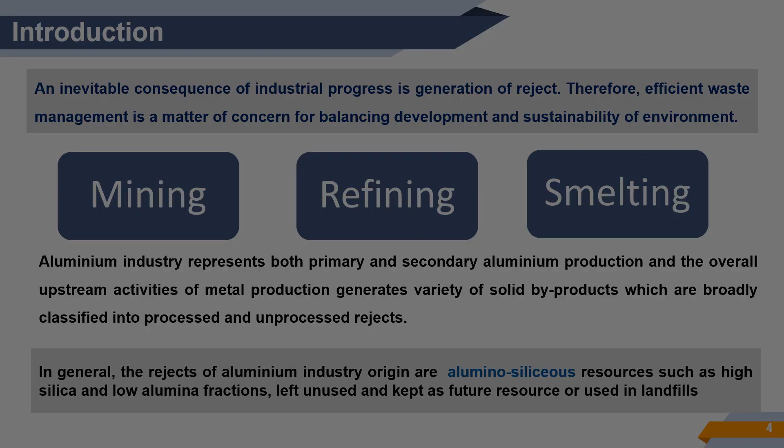Over the years, the outlook on process leftover or byproduct has changed, and the leftover materials are considered the best resource for secondary applications.

Solid rejects of aluminium industry are precisely inorganic materials, and most of them are mineral-rich secondary resources. These materials are a readily usable resource for industries such as building and construction, road construction, paint, pigment, and paper industries, ceramic and castables, and are also useful for extracting valuable mineral values such as rare earth and precious metals.

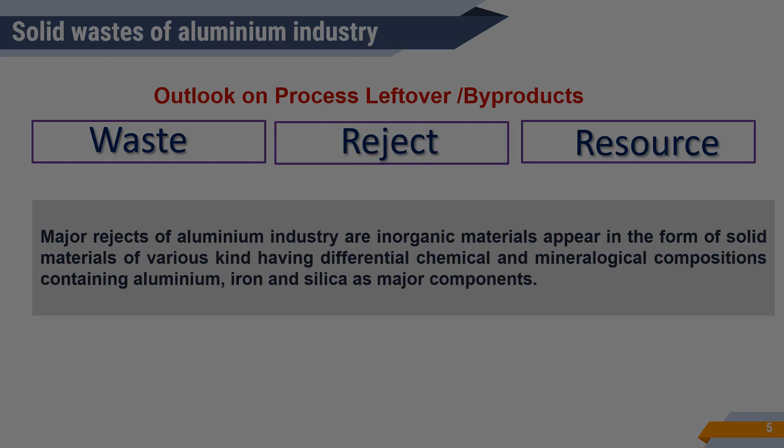Both primary and secondary production of aluminium are left with a variety of solid rejects which are useful material for productive applications. Many of the rejects from the aluminium industry appear in ready usable form. The advantage of rejects from aluminium industry is that they possess innate material synergy among themselves and with many reject materials of other sources such as steel, power, oil, biomass, etc.

That means, based on the chemical and mineralogical composition, these materials can be mixed together to make a composite of better quality for specific applications.

The details are discussed here as alternative resource for the production of different types of building materials based on a non-fired and chemical process route. This presentation precisely highlights the potential of the processed and unprocessed solid rejects of aluminium industry origin as resources for making geopolymer products along with technical hints of value addition for commercial exploitation.

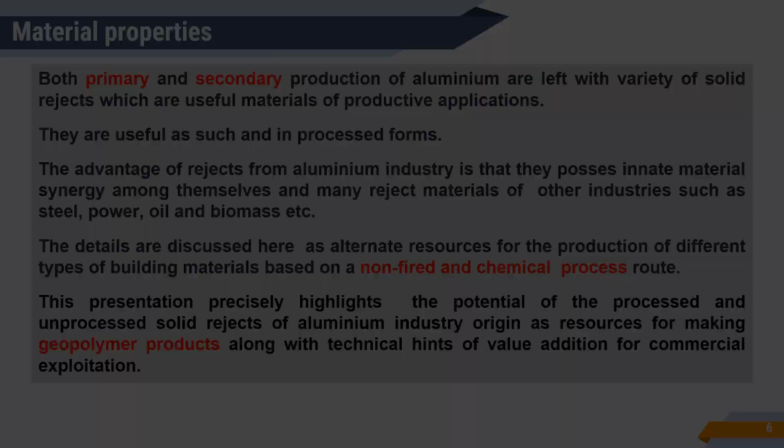The material input and quantum of byproduct generation is very typical for primary aluminium production. The raw material input for production of 1 kg of metal starts with approximately 4 kgs of bauxite, and the Bayer process yields approximately 2 kgs of alumina. Further, the energy intensive electrolysis process additionally consumes approximately half a kg of materials in the form of carbon and cryolite.

Since the quantum of waste generated represents the extent of pollution and material loss, there is a need for reliable and applied process options for rejects generated during the mining, processing, production, as well as recycling stages.

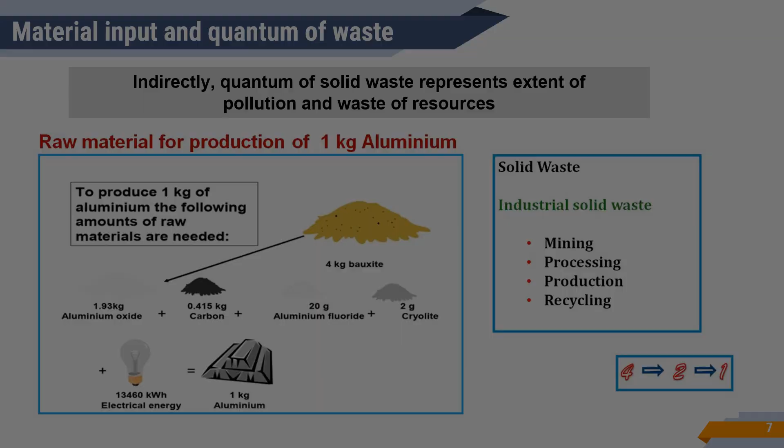Secondary aluminum production or aluminum recycling also generates different types of waste materials. The major solid rejects generated during aluminum recycling are filter dust, salt slag, and furnace lining. The chemical combination of these materials is good enough to make suitable combination materials with other industrial rejects or rejects from primary aluminum production.

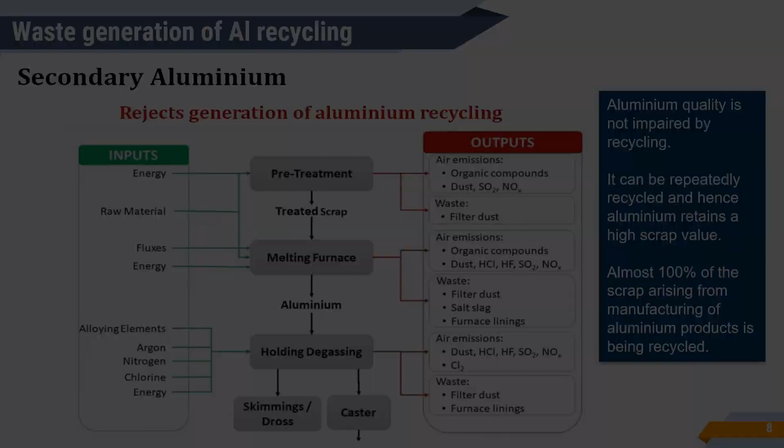Let us have a look at the processed and unprocessed rejects of primary aluminum production. Low-grade bauxite, overburden laterite, kaolinitic khondalite, partially lateritized khondalite, and lithomargic clay known as saprolite are some of the major unprocessed resources largely associated and available at the bauxite mining site.

Processed rejects of aluminum production mainly represent red mud, aluminum dross, and spent pot lining material known as SPL. These reject materials have distinct characteristic features, chemical composition, and mineralogical composition that differentiate them from the parent bauxite or the starting material used in the process.

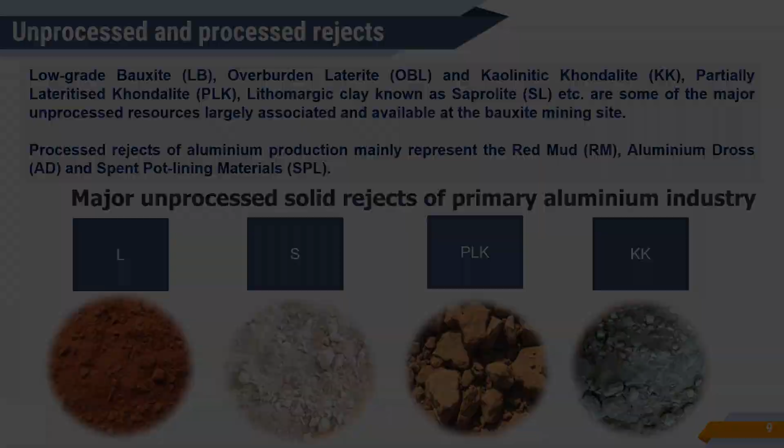Kaolinitic khondalite (KK) has similar properties to PLK and exists beneath the bauxite layer. KK possesses more silica, alumina and less iron in its chemical composition. In India, the bauxite mines of the Eastern Ghat region, located in Odisha and Andhra, have both PLK and KK horizons.

Saprolite is composed of clay minerals that result from in-situ weathering of bedrock by acidic groundwater. A complete laterite bauxite profile usually comprises four horizons and rests on the parent rock, which provides the source material for bauxitation. In most bauxite deposits of Western Ghat, Maharashtra, Chhattisgarh, Jharkhand, and Gujarat, this rests on a saprolite zone.

Lateritic soils are formed in the tropics through weathering processes that favor the formation of iron, aluminum, manganese and titanium oxides. This consists of minerals such as kaolinite, quartz, hematite, aluminogoethite, gibbsite, boehmite, diaspore, anatase, rutile, etc. The laterite contains high iron oxide, low alumina and low silica.

The laterite derived at the bauxite mine is generally known as overburden laterite, which is removed from the top layer during mining activities.

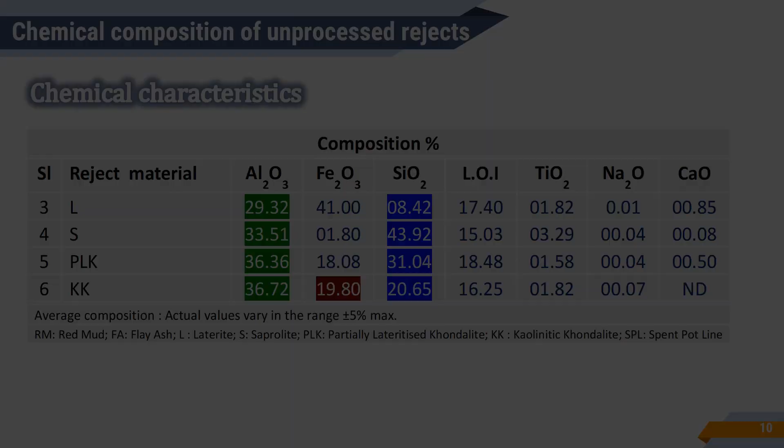Aluminium dross, bauxite residue known as red mud, spent pot lining (SPL), filter dust, salt slag and furnace lining are the major processed waste or reject materials generated during aluminium production. Red mud is the largest solid waste and the least utilized of all the solid rejects generated.

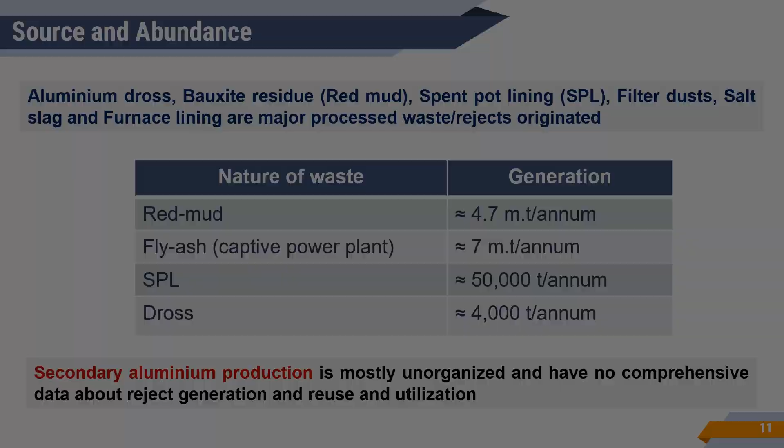Secondary aluminum production is mostly unorganized and has no comprehensive data about reject generation, reuse, and utilization. Red mud is the largest and least utilized solid reject of the aluminum industry. One ton of aluminum metal production generates approximately 3 tons of red mud.

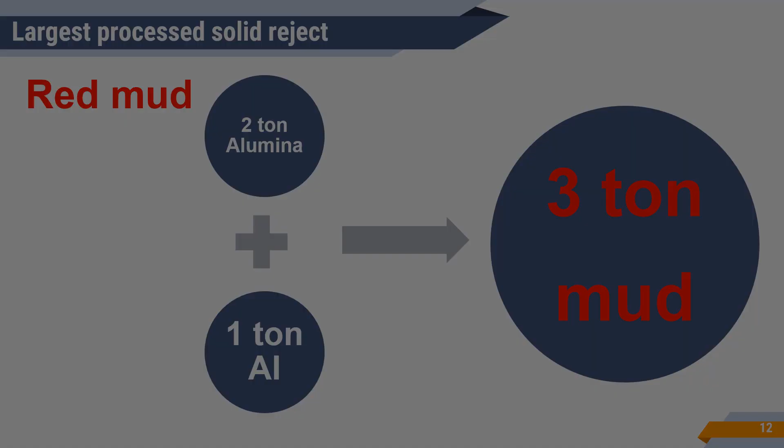The characteristic feature of red mud is a high percentage of Fe2O3. Almost 50% of the total mass constitutes Fe2O3, along with a good percentage of alumina and silica, as well as sodium and calcium.

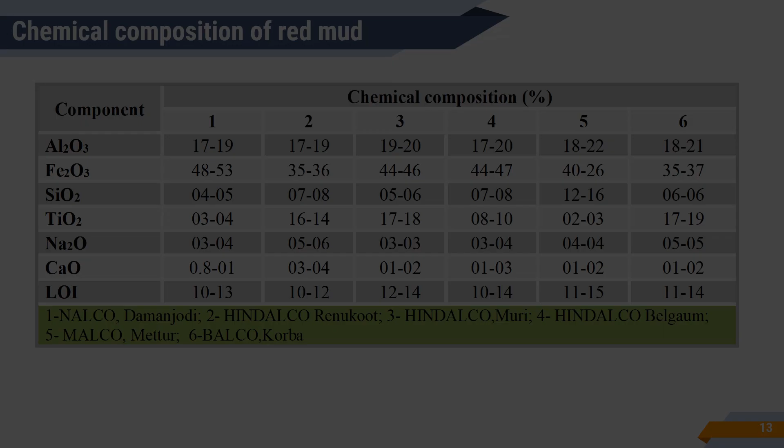Other processed rejects of the aluminum industry containing aluminosilicates are SPL, anode butts and aluminum dross.

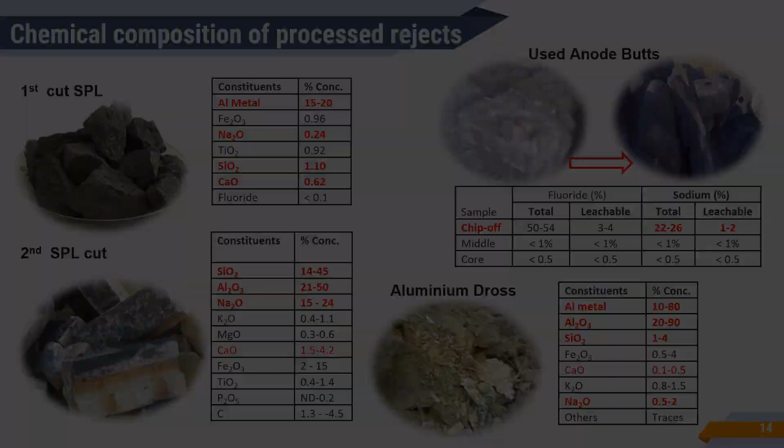Of late, industrial rejects are considered secondary resources for manifold applications involving recovery of mineral values, precursor for onward processing, as well as raw materials for product development. Resource augmentation based on workable utilization of rejects presents a successful model, highlighting the use of minimum processing steps, low emission, energy efficiency, speed, low cost, and marketing options, etc.

The vast increase in carbon dioxide and waste generation in recent decades has been a major obstacle to sustainable development and sustainability. In the construction industry, the production of ordinary Portland cement is a major greenhouse gas emitter, accounting for almost 8% of total carbon dioxide production in the world.

To address this, alkali activated materials and geopolymers have more recently been introduced as a green and sustainable alternative to ordinary Portland cement, with significantly lowered environmental footprints. Their use to replace Portland cement products generally leads to vast energy savings and reduced use of virgin materials, resulting in sustainable concrete production.

By doing so, it reuses the solid waste generated in industrial and manufacturing sectors, which aligns with the circular economy. In turn, it reduces the need for ordinary Portland cement and its consumption, and subsequent emission of carbon dioxide to the environment. As displayed in the previous slides, the chemical composition of almost all solid rejects of the aluminum industry suits well for making geopolymer-based cementitious material for building and construction needs.

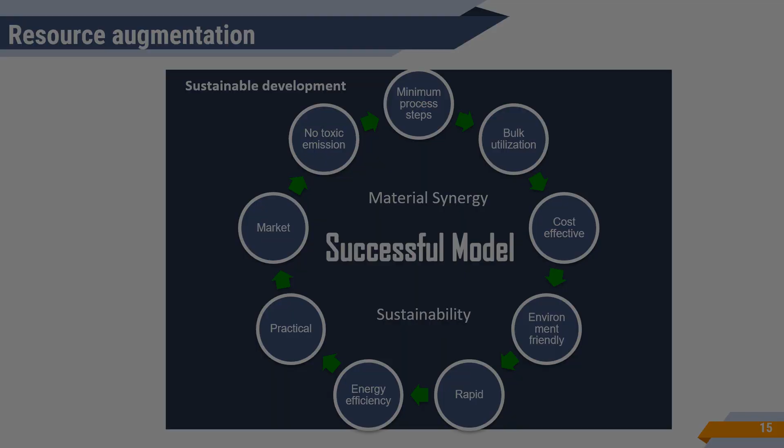Aluminum industry rejects possess high mineral values and excellent properties suitable for making sustainable building materials useful for infrastructural and construction applications. Sustainable construction refers to the adoption of building design, construction methods, and materials that are environmentally amenable. Through sustainable construction, we optimize the use of natural resources by recycling and reuse of material, so as to reduce our dependence on natural raw material.

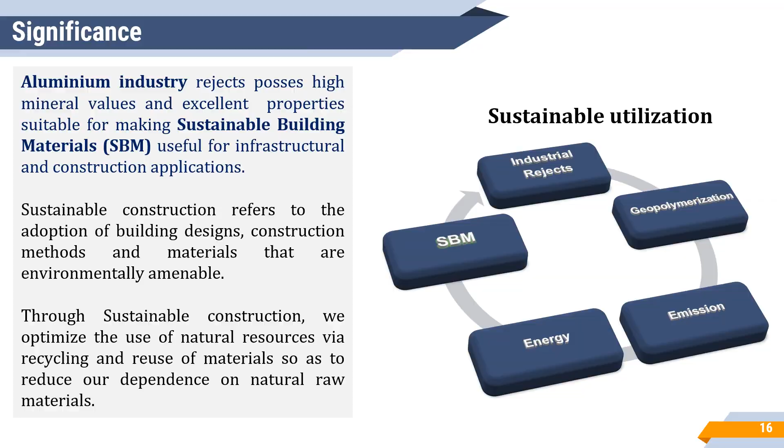The rejects and discards of processed and unprocessed materials of the aluminum industry are aluminosiliceous in nature. They contain a good amount of alumina and silica in amorphous, hydrated, and combined form. The chemical nature of this material is well suited for making geopolymer-based building materials as received, or in combination with rejects from other industry origins such as steel industry, biomass, power industry, or mining rejects of non-ferrous metals such as manganese, zinc, lead, etc.

Geopolymers are amorphous aluminosilicates which can be produced by the reaction between silica and aluminosilicates in an alkaline medium at ambient or elevated temperature ranging from 25 to 100 degrees centigrade. The technology was first introduced by Joseph Davidovits in 1978, and his work shows that its adoption could reduce the carbon dioxide emission caused by cement industries.

Geopolymer production process is simple, energy efficient, and eco-friendly. It exhibits excellent durability and good mechanical properties, and can replace conventional materials from low-tech to high-tech applications. In general, every material is suitable for geopolymer production which contains free silica and free alumina bearing mineral phases.

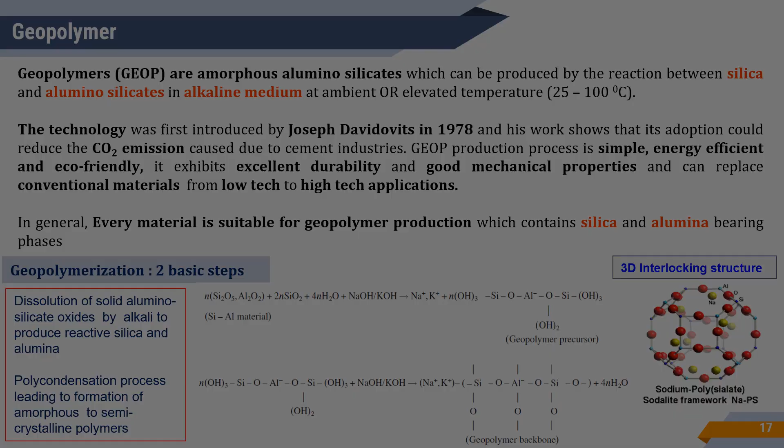The advantage of geopolymer is that the geopolymerization process is a cost-effective and environment-friendly process route for converting different types of industrial rejects into useful materials, especially building units. The geopolymer process, or geopolymerization, requires no heating or firing. The process can take place at ambient temperature, with no emission taking place during the process of geopolymerization, and the binding takes place without the use of cement.

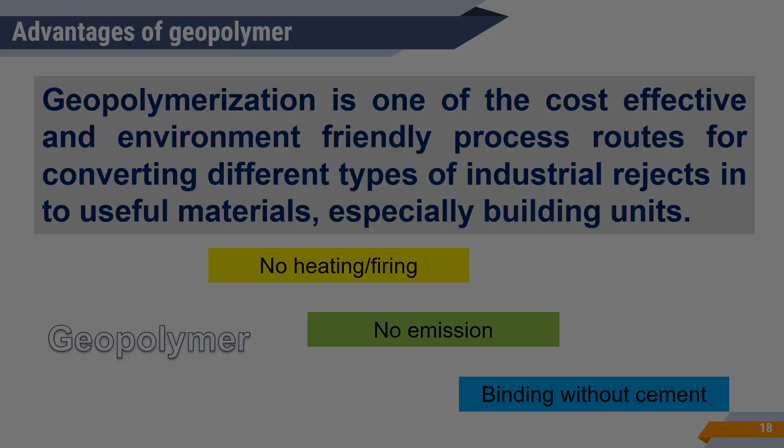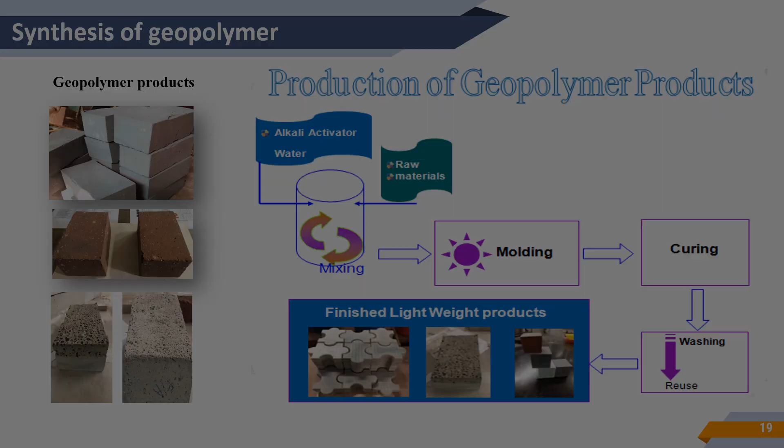Synthesis or production of geopolymer involves three process steps: mixing, molding, and curing. JNARDDC conducted thorough studies on synergistic utilization of about 75 industry rejects in combination with aluminum industry rejects for making geopolymer products for building and construction.

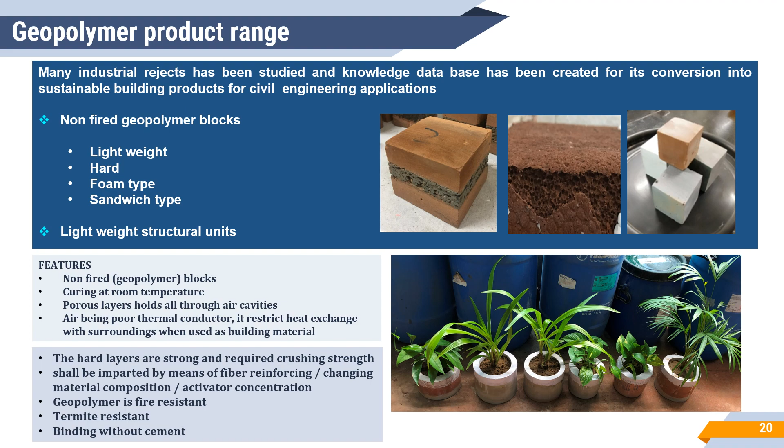Lightweight, foam type, sandwich type, and hard high-strength products were developed by the non-fired route for suitable commercial exploitation. The studies identified good synergy among aluminum industry rejects, steel industry rejects, as well as biomass-based rejects such as rice husk ash, bagasse ash, and corncob ash, for development of green building material based on geopolymerization.

The three simple steps of mixing, molding, and curing make the geopolymer matrix. Mixing for alkali activation of raw material is most crucial, since all alkali activated materials do not make geopolymer products. To make geopolymer matrix, low calcium aluminosilicates are generally preferred.

Reject materials such as PLK, KK, laterite, etc. are best suited for making geopolymer matrix. The structural units of geopolymer are different from those of alkali activated slag. Geopolymer has a three-dimensional structure, while the alkali activated matrix has no three-dimensional structure.

They mostly exist in Q3 structure. So even if alkali activated materials have higher strength than geopolymer, they have very poor durability properties compared to geopolymer. Alkali activated materials are not polymers, so they cannot be called geopolymers, and many scientists and civil engineers mistake alkali activated material for geopolymerization.

The combination of alkali activator and raw material forms the mix design. Both alkali activator and raw materials could be single or multi-component mixtures. The preferred alkali activator is sodium hydroxide in view of low cost and availability. For mixed alkali activator, sodium silicate is used with sodium hydroxide in a specific molar ratio depending on the chemical composition of the raw material of choice.

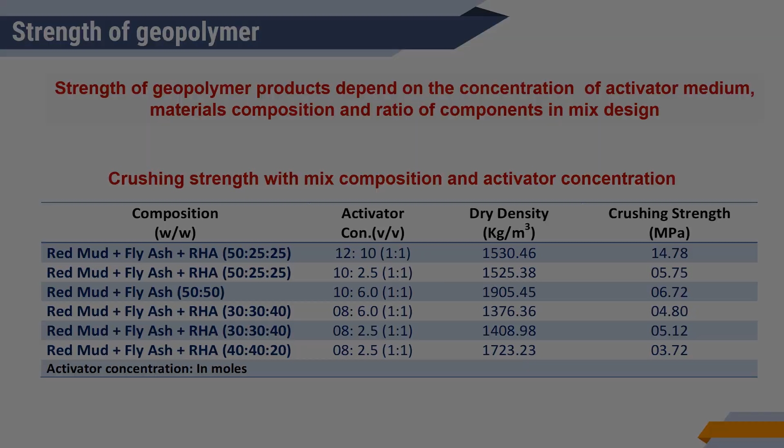The crushing strength or compressive strength of some of the geopolymer matrices we have derived from aluminum industrial rejects in combination with other source materials are shown here. We have achieved crushing strength ranging from 10 to 25 MPa, where the minimum required crushing strength is 3.5 MPa for its use as building material.

The use of mixed raw material facilitates the availability of alumina and silica for faster reaction in alkaline medium. For example, red mud is mixed with fly ash and rice husk ash, and the geopolymer matrix has shown about 19 megapascals of crushing strength. The input of fly ash is not sufficient for easy availability of silica, in view of the presence of quartz instead of amorphous silica. The requirement of amorphous silica for alkali activation reaction is achieved by the input of rice husk ash.

Similarly, the required crushing strength for a specific combination matrix can be achieved by selection of suitable material combinations, or by changing the ratio of material input, or by changing the concentration of sodium hydroxide and sodium silicate in the activator medium. So the flexibility of choosing the concentration of alkali activator and the mix design as a whole makes this technique more preferable for making geopolymer matrix for building and construction applications.

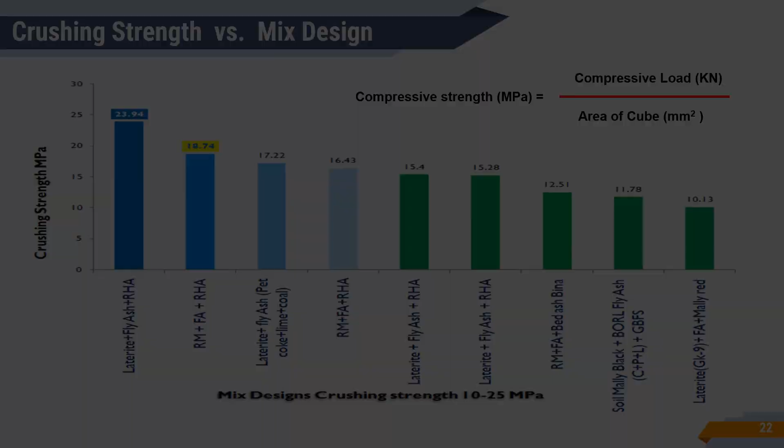When we make geopolymer for construction and building applications, the following parameters are decisive and related to the material properties. Crushing or compressive strength of geopolymer is directly proportional to alkali activator concentration and curing temperature. Water absorption depends on the curing temperature and dry mix composition, and the physical synergy of material has a direct impact on water absorption.

As molarity increases and curing temperature decreases, efflorescence of geopolymer increases. Density of geopolymer does not depend on the concentration of activator; it mostly depends on the nature of raw material composition.

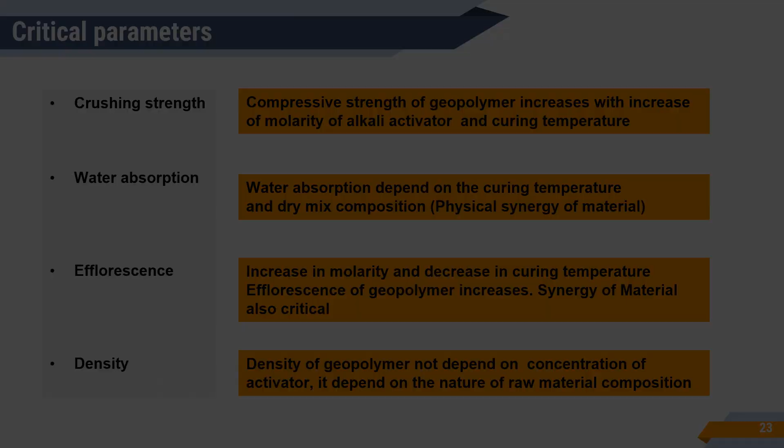Increasing building construction is one of the fastest growing drivers of carbon emissions. Therefore, energy conservation and carbon reduction in building have become increasingly crucial in the context of global carbon neutrality.

Construction is the second largest industry in this world. Embodied energy, carbon emission, economy, utility, durability, and comfort are the main concerns of current classical building design.

In order to reduce the carbon footprint of infrastructure, it is important to account for the energy that is embodied in the materials that we use. Embodied energy is a sum of energy requirements associated directly or indirectly with the delivery of goods or services, including the energy used to extract, manufacture, and transport all the materials to be used.

For the overall analysis of developed geopolymer, it is observed that with the increase in the sodium hydroxide molarity, the compressive strength, embodied energy, and carbon dioxide emission increases.

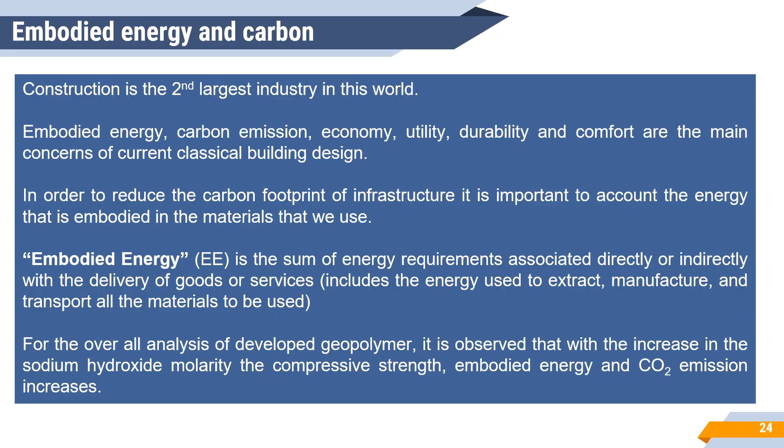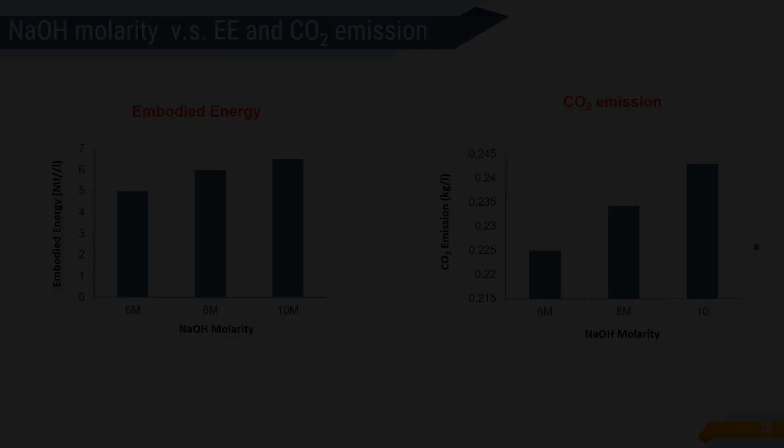It was observed that the XRD data or mineralogy of material is useful for choosing the right combination of raw materials based on the presence of active mineral phase within the component oxide.

For example, the prominence of crystalline quartz and amorphous silica in total silica, as well as more active gibbsite, less active boehmite, and least active diaspore in minerals usually present in low-grade bauxite, overburden laterite, and other clay mineral rejects at different ratios in total alumina for alkali activation at ambient condition.

This information of active mineralogical phases within the specific mineral oxide is also useful for measured use of alkali activator, that is a combination of sodium silicate and sodium hydroxide for geopolymerization.

The reserved use of alkali activator in geopolymer facilitates better economics and quality of geopolymer product. Proper use of alkali for activation of active mineral phases in the raw material marks low efflorescence and material strength

by encapsulating the less or non-active mineral phases or mineral components within the geopolymer three-dimensional structures based on the tetrahedron sharing of active alumina and silicon atoms.

Further, the limited or controlled use of sodium hydroxide in the alkali activator keeps a cap on the emission of carbon dioxide as well as embodied energy in the overall geopolymer matrix.

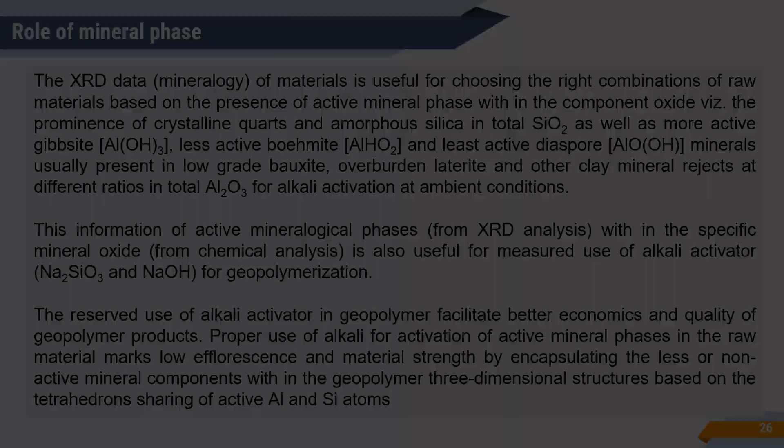A comparative study is presented to affirm the superior quality of geopolymer based building material. Physical properties of overburden laterite based geopolymer brick was compared with the commercially available burnt clay and fly ash bricks.

The comparison showed that the density of OBL brick is 12.5% and 22.2% lower compared to burnt clay and fly ash bricks respectively. The achieved compressive strength of OBL at ambient temperature is far more than that of burnt clay and fly ash bricks, which will ultimately help in saving energy required in case of heat curing.

Overall, the developed geopolymer brick using laterite as primary raw material resulted in performance improvement. Wherever higher strength of brick is a criteria, these geopolymer bricks can be conveniently used for construction purpose.

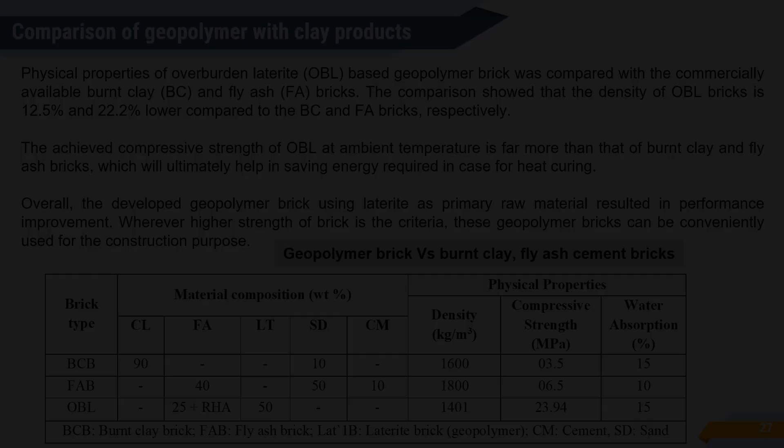The following are the inferences of the case study. Compressive strength of OBL geopolymer brick is as high as 23 MPa. The water absorption and efflorescence are well within the permissible limit given by Indian standards.

Compared to burnt clay and fly ash brick, the basic properties of geopolymer blocks developed shows that it can be used in building and construction as a substitute for burnt clay bricks or clay products, depending on the purpose and engineering models. Apart from that, the described process, geopolymerization, can contribute significantly to the environmental preservation, since there is a

practical possibility of converting large quantity of aluminosiliceous industrial rejects as alternate building materials. This mineral-rich resource needs to be exploited with respect to the chemical and mineralogical parameters for developing value-added products at ambient conditions, thus saving energy, environment, and natural mineral resource for future needs.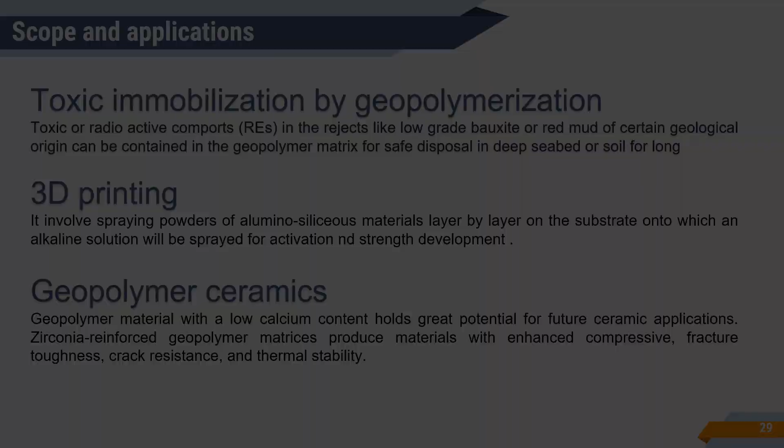Coming to the conclusion, geopolymerization is useful for making a wide range of building materials without firing and emission of greenhouse gases. Building and construction industry possesses the space for consuming the largest volume of industry rejects as geopolymerized building materials.

Solid rejects of aluminum industry origin are best suited for making wide variety of building materials with or without the addition of materials from other sources.

Chemical and mineralogical data of raw materials need to be considered for making mix designs of geopolymer product for reduced use of commercial ingredients as alkali activator.

Since the embodied energy and overall carbon dioxide emission is directly proportional to the alkali activator composition, calculated use of sodium hydroxide is advised for making activator composition.

Scope and use of geopolymer as a reliable medium for containing heavy metal pollutants, radioactive elements, and other toxic components for safe disposal need to be investigated.